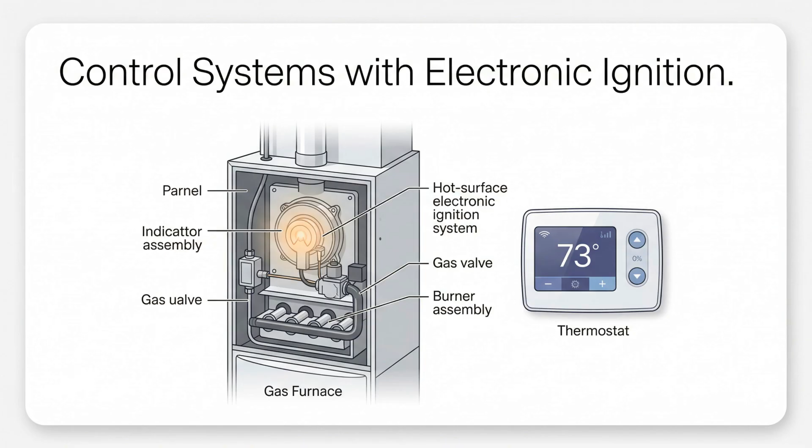As energy costs rise and the need for efficiency grows, the gas industry has largely moved away from standing pilot lights. Today, we use electronic ignition systems that only light when needed, saving energy and reducing expensive service calls caused by wind or rain blowing out a pilot.

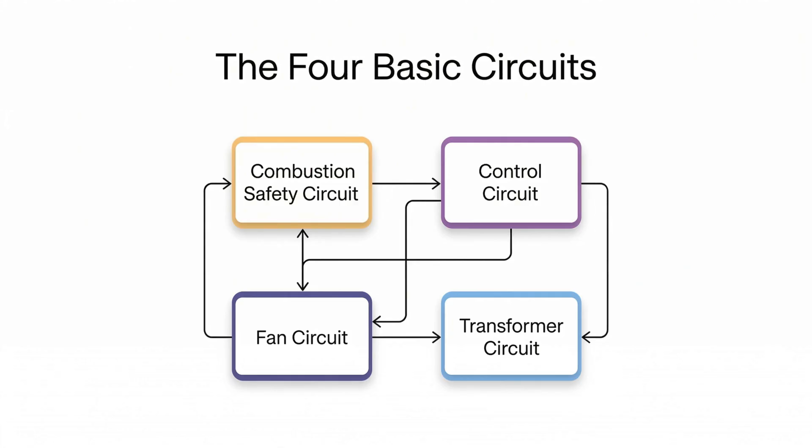Just like basic control systems, electronic ignition setups rely on four main circuits. The control circuit uses 24-volt power from the thermostat to start the process. The fan and transformer circuits handle air movement and voltage reduction. But the real star here is the combustion safety circuit, which electronically monitors the flame and can react to a flame failure in less than 1 second.

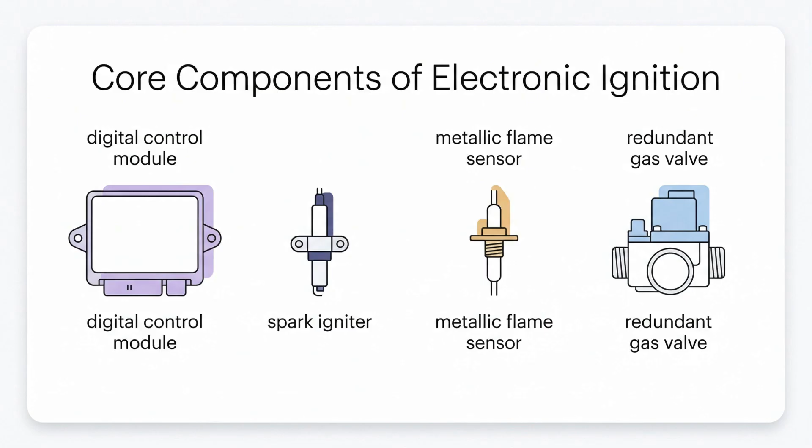There are four primary components that make these systems work. The control module is the brain, sequencing the entire light-up procedure. The igniter creates the spark or heat to start the fire. The flame sensor acts as the eyes, detecting if a flame is actually present. Finally, the redundant gas valve provides the fuel, using a double valve design for an extra layer of safety.

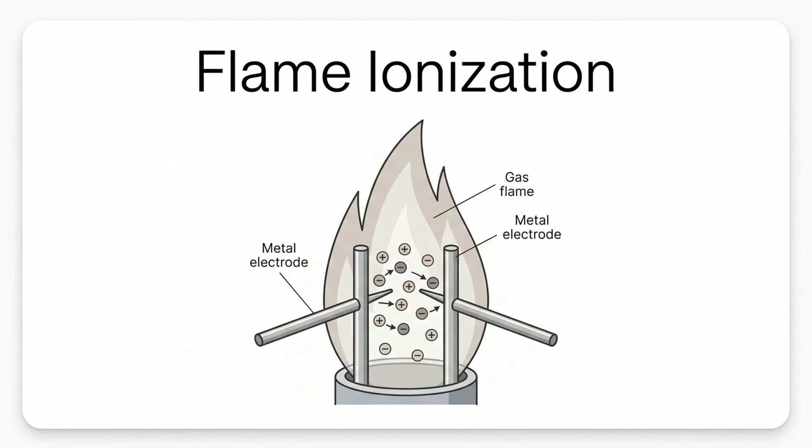To understand how a system knows a flame is present, we have to look at flame ionization. When a flame burns, the intense heat causes air molecules to collide forcefully, knocking electrons loose and creating ions. If we place two electrodes in that flame and apply a voltage, those ions will actually conduct a very small electrical current right through the fire.

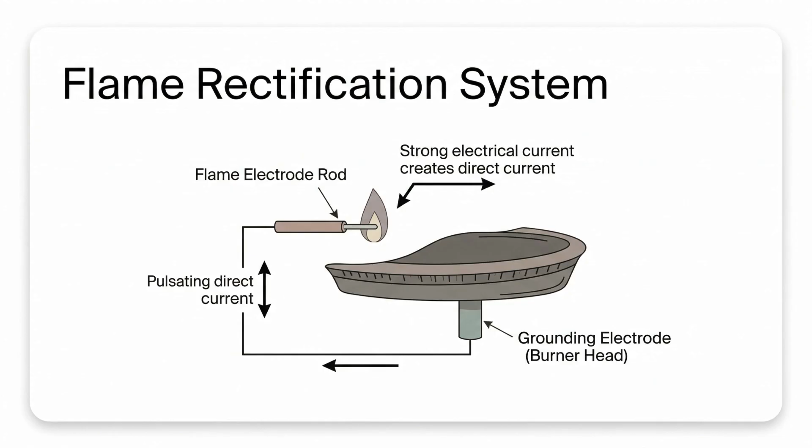Early systems used alternating current, but they couldn't tell the difference between a real flame and a short circuit caused by carbon buildup. Today, we use a flame rectification system. By making the ground electrode at least 4 times larger than the flame rod, the flame conducts electricity much better in one direction. This turns the alternating current into a pulsating direct current, which the module easily recognizes as a true flame.

When dealing with control modules, you will hear a few key terms. Trial for ignition is the specific window of time the system allows to establish a flame. If no flame is proven in that time, the system goes into lockout, requiring a manual reset. Finally, flame failure response time is how incredibly fast the sensor reacts to a lost flame and shuts off the main gas valve.

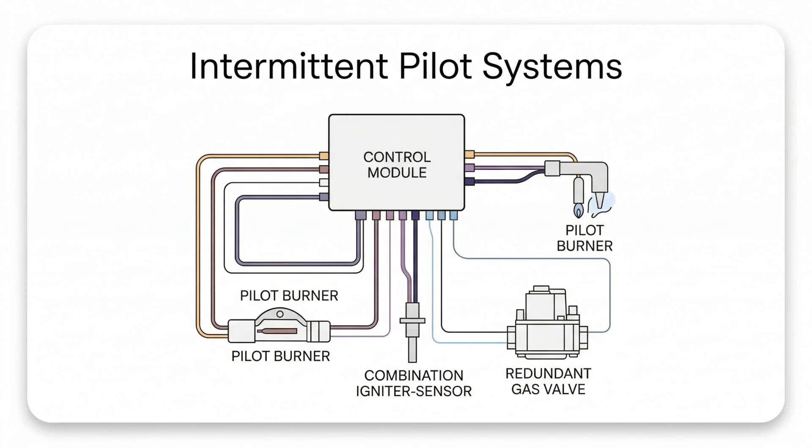Let us look at the first of 3 main module types, the intermittent pilot. When the thermostat calls for heat, the module does a safe start check, then sparks the igniter and opens the pilot valve. Once the sensor proves the pilot flame is lit and stable, it stops sparking and opens the main gas valve. The pilot only burns while the main burner is running.

Next is the direct spark ignition system. This setup skips the pilot entirely. After the safe start check, the module simultaneously sparks the igniter and opens the main gas valve. The spark directly ignites the main burner. Once the sensor detects the main flame, the spark turns off, and the system monitors the fire for the rest of the heating cycle.

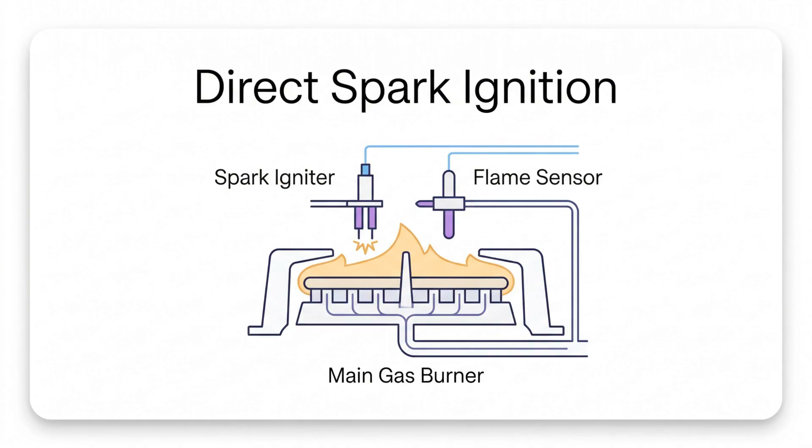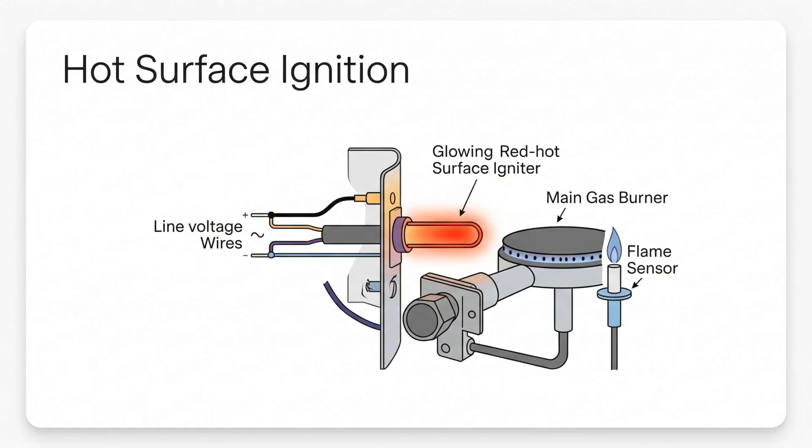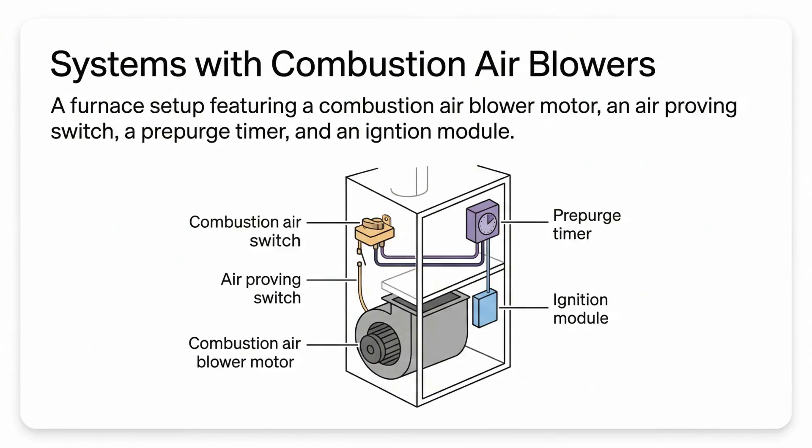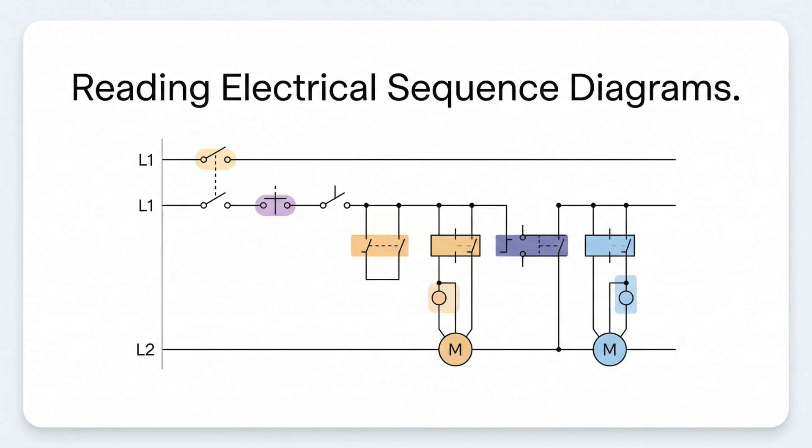As a technician, you must be able to read electrical ladder diagrams to troubleshoot these sequences. You read them from left to right, from the hot line to the neutral line. Switches are almost always located on the hot line. By tracing the path, you can follow the exact order of operations, from the thermostat closing to the draft motor starting, right down to the main burner firing.

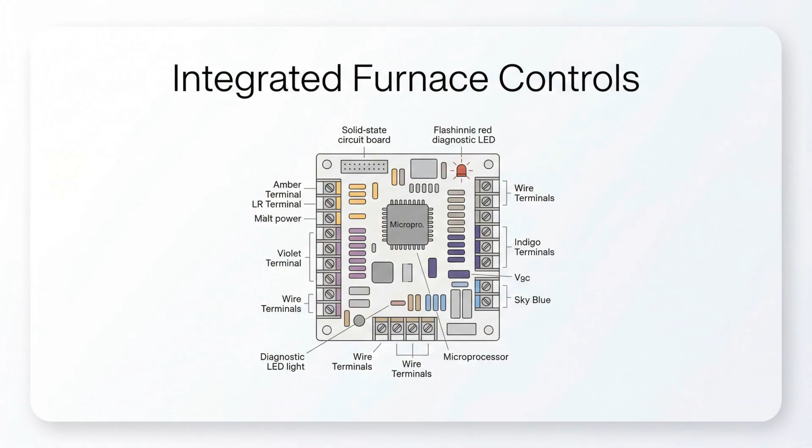To wrap up, electronic ignition systems provide safer, more efficient heating by eliminating standing pilots. Remember that they rely on flame rectification to accurately prove a flame exists. Whether you are working with an intermittent pilot, a direct spark, or a hot surface igniter, understanding the sequence of operations and how to read integrated diagnostic codes will make troubleshooting highly effective.